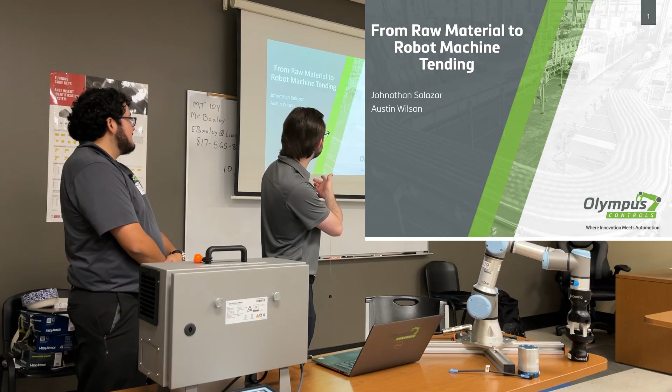So I'm Austin Wilson, we're with Olympus Controls, and Johnathan Salazar. So we'll be talking about machine tending, so how to work with a robot and tend a machine. A little bit of background about us.

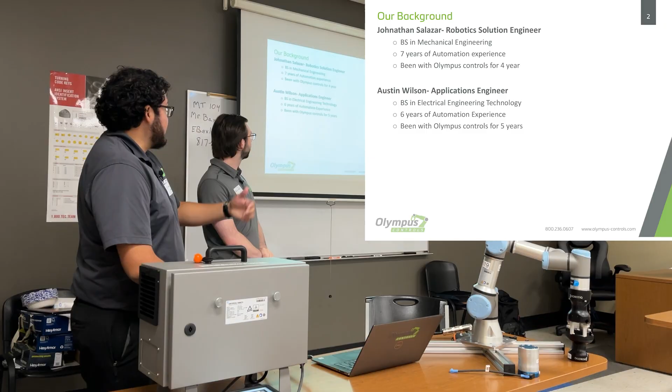So my name is Johnathan Salazar, Olympus Controls. I am the robotics solution engineer. A little bit about me, I graduated from University of North Texas in 2018 with my mechanical engineering degree and kind of hit the ground running with automation. I did my capstone project, my internship, and first job all with the UR robots and automation things. So got about 7 years of experience at this point and been with Olympus now for about 4 years.

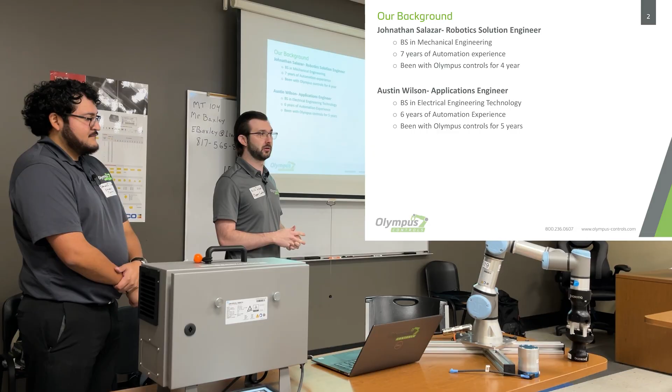I'm Austin, like I mentioned. I am an applications engineer with Olympus, so I focus on technical installs, technical support for our customers and our sales team. Been working with automation for about 6 years now and got my bachelor's in electrical engineering technology.

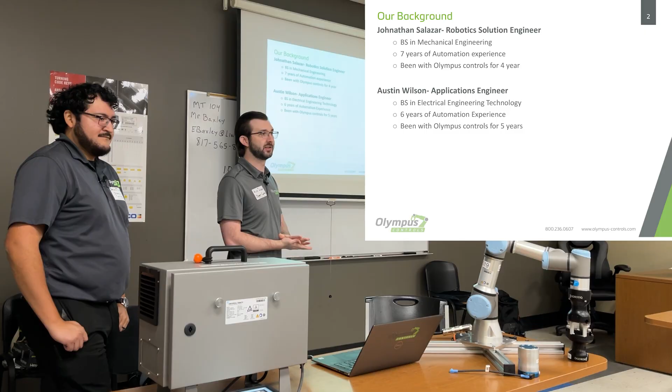A little bit about our company background. So we work for Olympus Controls. Olympus Controls was founded in 1998, in the Northwest area near Portland, Oregon. We're a high-tech automation distributor, and we focus a lot on motion controls, machine vision, and now recently robotics.

But we're also diving into more engineering solutions. We have a whole team dedicated to just doing custom builds from the ground up, from simple things like robot mounts to custom enclosures, all the way up to a custom autonomous vehicle robot. So kind of an all in-house powerhouse.

We've been with UR robots for about 12 years now. And now, plus or minus one, we're the largest UR distributor in North America for Universal Robots. UR was founded in 2007, and they are now the #1 collaborative robot supplier in the world. So they coined that cobot term and did a lot to push the idea of the collaborative robot, not just the traditional industrial robot, but a more approachable, easy-to-use, easy programming kind of robot.

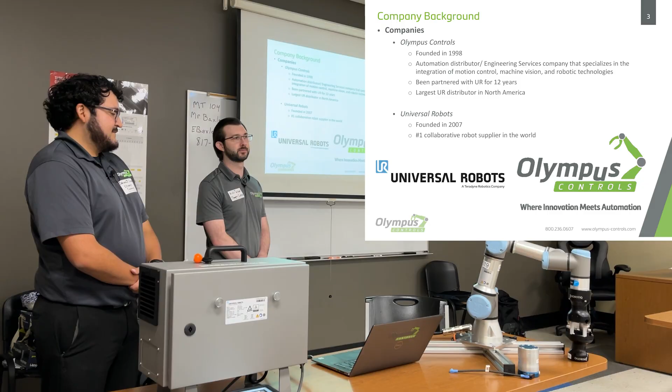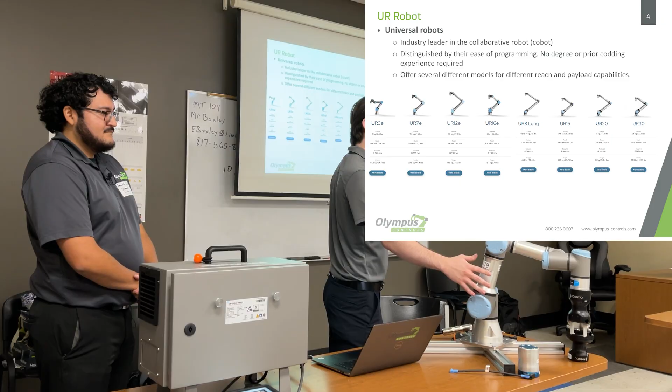And this is their product line of all the robots that UR has. So they go as small as these robots here with the 3E. The number you see there is their model and also the payload for the robot. So 3 is 3 kilograms, about 7 pounds is what it can pick up. And it goes all the way up to 30 kilograms, so over 60 pounds is what that highest end robot can pick up.

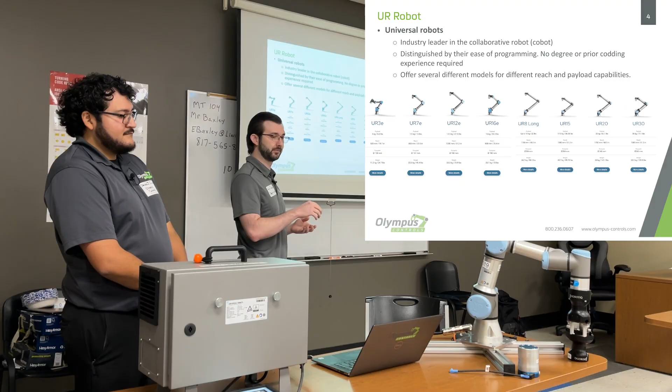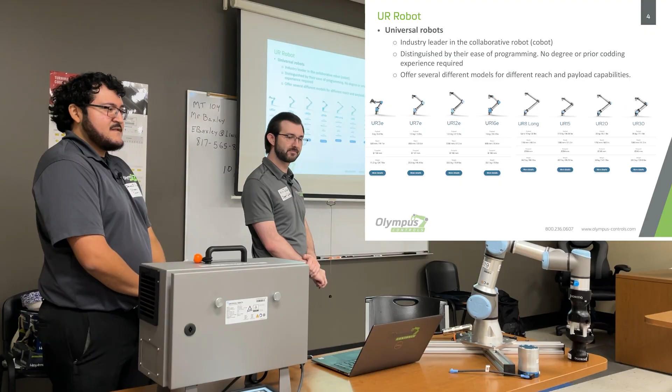So they have a lot of different offerings, a lot of different reaches as well. If you need a longer robot, they have a new long robot right there. Rule of thumb is the bigger number, the bigger reach of the robot, bigger payloads. A couple of discrepancies, like the 8 is a little bit less payload, but longer than the 16 and 12. But rule of thumb is bigger number, bigger payload for sure, usually bigger reach.

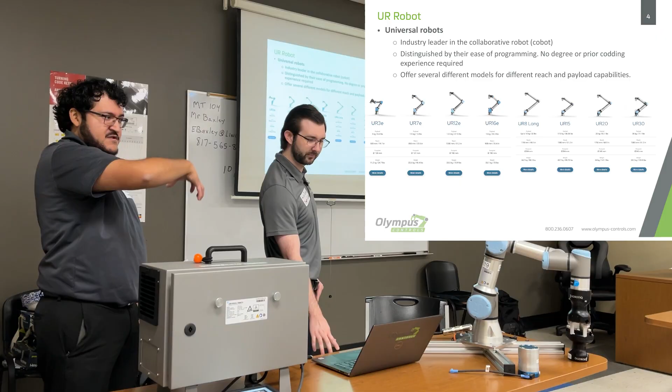The sweet spot for machine tending is usually around that 12E range to the 20, depending on part size. That's a good reach for reaching multiple machines to and from your work area and picking up the heavy parts with tooling.

And then this is a quick guideline for different steps to think about if you're doing any type of collaborative robot install, not just machine tending, so your throughput, the reach and the payload of the robot, and parts and presentation, that's a really big one. Not enough people focus on it, because with all automation, we really want our parts to be oriented and fixed the same way every time.

The robots are going to go to the same place every time. So if you can make sure your parts are in the same place every time, you'll be solid. But they really don't like variation. So if you can get rid of all your variables and movement in the system, that'll really help you out a lot.

Collaboration, you have to consider how it will work with humans. Connectivity and integration, I'll talk a little bit about that later in another slide, but you really just need to think about how it's going to interface to your machine, and there's a few different ways of doing that.

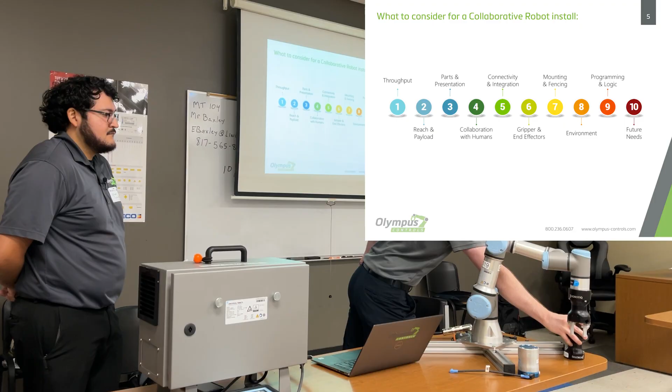Grippers and end effectors, so Jonathan will talk about that a little later, but we have a bunch of different options between concentric grippers, 2-finger grippers, vacuum, suction cups. We have this little magnetic gripper here for ferrous material parts. And so that's another consideration.

We have mounting, fencing. So these are collaborative robots, so you normally don't really need fencing for them because they will stop if they hit someone. So your more standard, like what you'd imagine a really heavy-duty robot, those usually do need fencing because they can crush people. They can be very dangerous. And yeah, that's pretty much it.

Environment as well. So their newer robots are IP65 rated, so they're waterproof. So that's pretty cool. Keep in mind it is an IP rating, so it is water testing. Sometimes cutting fluid is a little bit more viscous than water. It can be a little bit tougher than typical IP ratings, but keep in mind there are options. You can add like a suit on top of it or some kind of waterproofing ponchos to ease with that.

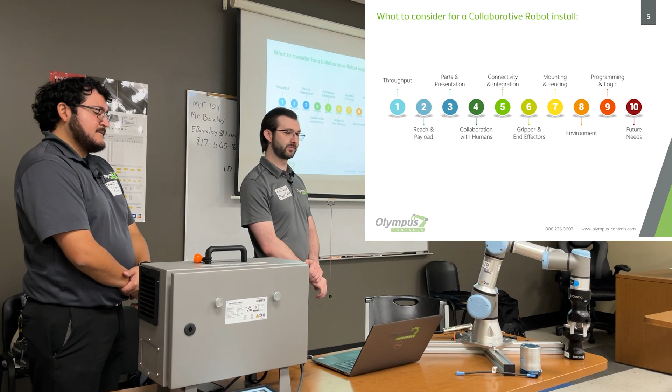Okay, so the 3 questions you should ask when dealing with machine tending: what kind of material are you dealing with? How many variations of parts are you dealing with? And then how is the part being presented? Those will kind of guide you in tooling options and part presentation, any kind of external equipment needed for the application. So first bullet here is where's the material coming from?

This is ranked from easiest to kind of a hard part presentation. Easiest would be the robot's not dealing with it. If it's a bar feeder inside the lathe machine, the parts feed automatically. The robot just deals with the outfeed machine part, gripping it, placing it in the finished pile.

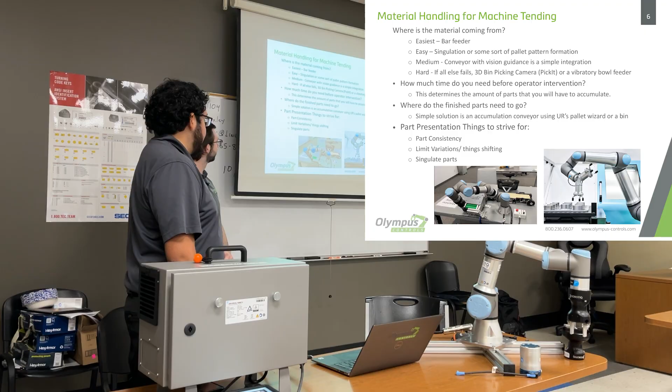Next up, for easy, would be some kind of singulation or some kind of pattern for you to take advantage of. Maybe the parts are stacked up on a table in a certain array, or it could be something simple, like the example here, a gravity feed system that feeds the part up to the same pickup position every single time. Correct, gravity fed like round stock. Typically gravity fed's good for round stock, kind of lathe machine tending, as long as you can account for all the part sizes. And then the pallet or templates is more for square parts, square blanks.

Next up in difficulty would be this medium example of maybe you're picking parts off a conveyor. That usually means coming off some kind of upstream process, and you have to account for some of the variation of the parts. They could be upside down, they could be skewed on that conveyor. Assuming we're flat, we can do something like a 2D vision system, or even some kind of mechanical guidance or fixturing for the parts. So the camera is integrated with the robot?

Correct. So Universal Robots is a brand just as the arm, and they open up their software to be open source. So a lot of third parties have come in and designed custom tooling, as Austin touched on. All these tools are not UR tools, they're a third-party brand: Robotiq, OnRobot, Zimmer. A lot of them have different 2D cameras that are nice and plug and play. They've got specific software, you upload the URCap to the robot, and it's plug and play. Tested and vetted by UR too. So that's the 2D vision example.

And then the hard level, the most difficult, would be some kind of random picking. Maybe the parts are on a conveyor, but they're all stacked up and skewed. So typically some kind of bin picking system. What you can do there is some kind of 3D bin picking software and camera to account for that, or maybe even something like a vibratory bowl feeder to help stage those parts. But that is going to add the most complexity to your programming, more cycle time, and more cost. Well, that's expensive.

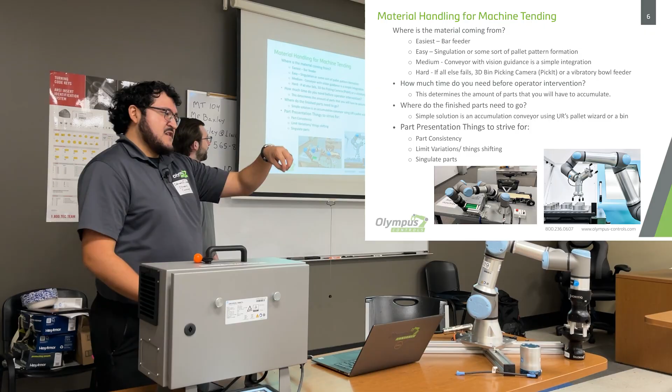Next bullet here, where do the finished parts go? Again, just thinking whole picture. After the part's machined from your CNC machine, where do you place it? It could be something simple, like back on an accumulator, a single drop-off point and the conveyor just queues it up. Or something simple like some kind of bin for the good parts. Depends on the part as well. If it's delicate, you don't want to drop it in a bin, you want some kind of nice placement. It could even be putting the finished part back on that same pallet you just picked from for the tender.

And then, of course, rule of thumb is the 3 things we strive for in machine tending for the parts is nice part consistency, meaning part to part, they're going to be the same size and same shape. You can run multiple size parts, that's fine, but part to part you want similarity.

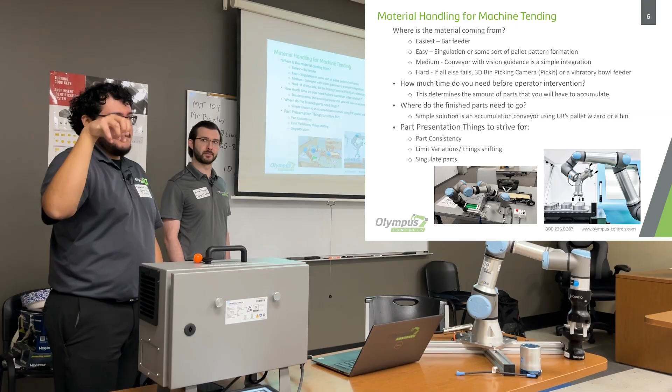The example we give is, think of your own arm as the robot arm. You're very repeatable, so you can come back to the same spot within 0.01 millimeters over and over again. But you're blindfolded, you have an oven mitt on, and you have a pair of tongs as your tool. So you don't have the ease of use of vision or force feel to pick up parts. So if something changes, if your part's differently shaped or it moves, you have no way of accounting for that. So you need extra things involved.

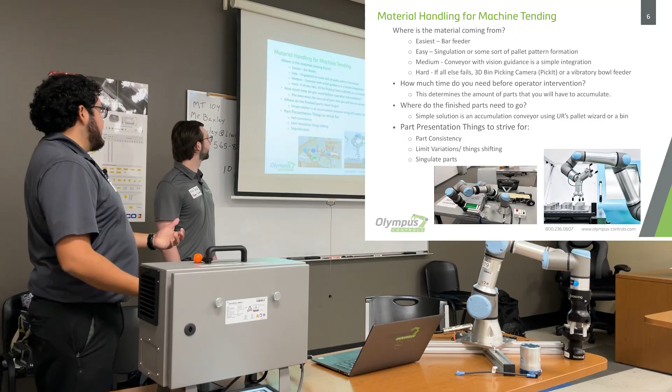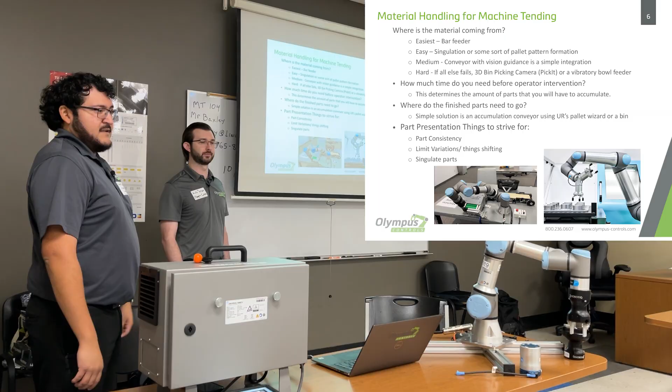The robots do have a built-in force sensor. We can take advantage of that to do a force feel and touch off, but it does add cycle time. So added tools, added costs, added time. So along that same topic, limit variations and things shifting. Make sure everything's nice and rigidly bolted down. You have some guide pins for your fixtures. That way when things come back in, it'll be in the same spot every single time. And if possible, singulate parts. Make it easy. One single pickup position.

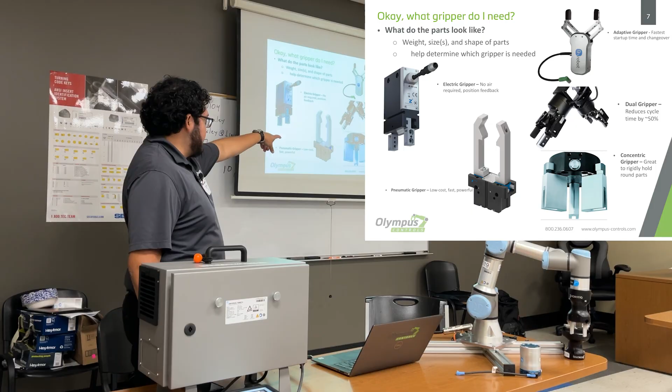One step up would be something like a simple electric gripper. They might have a URCap software, or they might not. It could be just IO settings, on, off. But this will give you a little bit more position feedback, a little bit more options, and the possibility of a URCap. Kind of in between there is the concentric gripper, bottom right. That one is more for round parts. 3-finger jaws that close in. That's great for any kind of round stock you might be picking up for lathe machine tending. Those can be either pneumatic or electric.

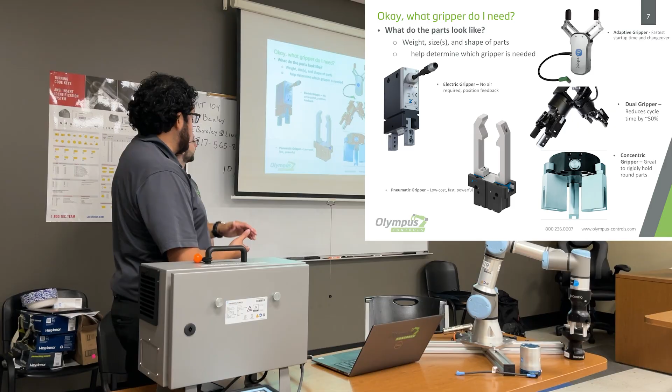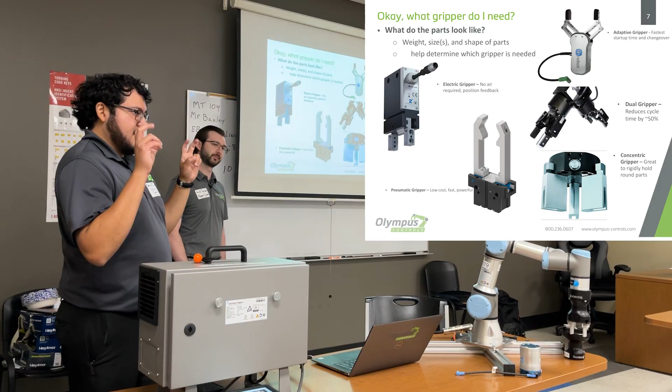And the top tier would be something like an adaptive gripper. A couple different brands. The ones we use a lot are OnRobot and Robotiq. These are more advanced adaptive grippers. The benefit is you have full access to the stroke, the speed, and the force. And they are collaborative, so they're not going to hurt the human being. It'll give you a little bit of a pinch, but it won't hurt you.

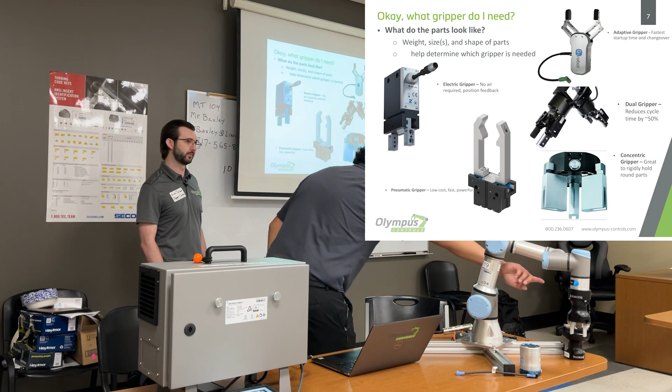They do come off the shelf with nice mounts and a nice even IO coupler, so you can bolt right to the end of the robot wrist, as shown here. So you limit a lot of that need for cable management, running tubes or pneumatic lines all the way across. It's right at the end of the robot.

And along with that same thing, dual gripper, that can be any of these above mentioned options. It's just doing 2 grippers instead of 1. If you think about it, that can help your cycle time immensely. The process normally is you open up the CNC machine, you'll pick up your finished part, drop it into the finished part pile, come back over, pick up a new blank, and load it into the machine.

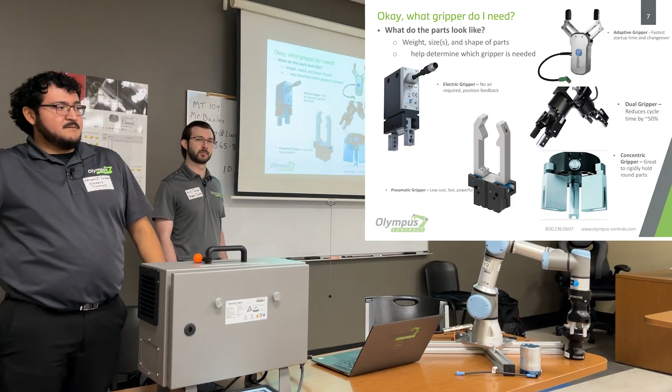That's a long process. If you have 2 hands, you can pick up a blank, open the door, go in, pick up the finished part, go ahead and drop off the new part, and then come out. You save half the time of coming in and out of the machine. So big benefit for machine tending, very common.

Along that same subject, we'll stay on with a real case study. This is one of our customers out of Tulsa, Oklahoma called McElroy. They are an in-house OEM manufacturer. They do things like spline tubes. They basically add the tube finning on the end of metal tubes. But they manufacture a lot of their machines in-house.

And so they got a bunch of CNC machines, and they're doing a lot by hand. There's no automation besides the CNC machine, and they're looking to automate, kind of get their feet wet with it. They approached us looking for a Universal Robot, a cobot. They were interested in ease of use, no need for other caging or safety equipment, and something they could redeploy to different machines if needed. So kind of redeployable robots.

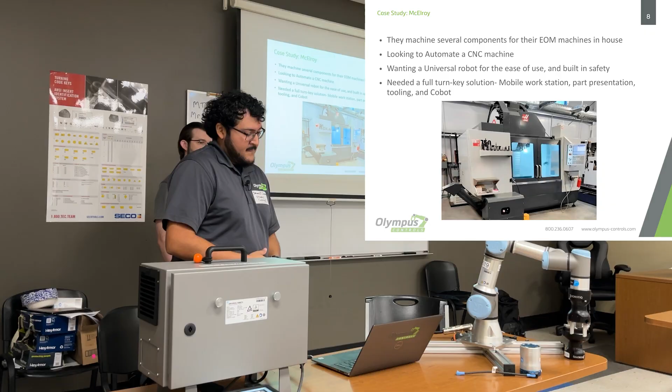They did ask for a full turnkey solution, so they wanted everything. They wanted the mobile stand, the cobots, any kind of tooling, any kind of custom grippers, part presentation fixturing, and help on site with deployments.

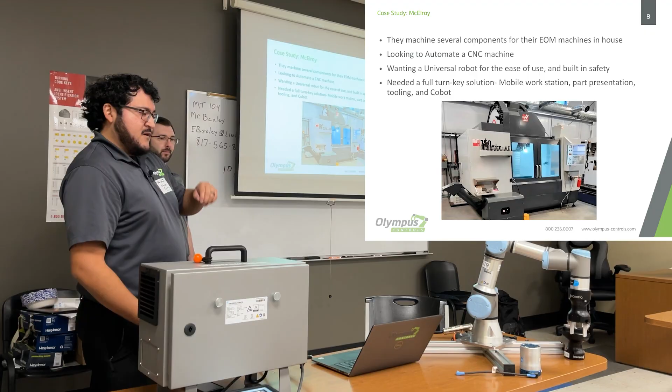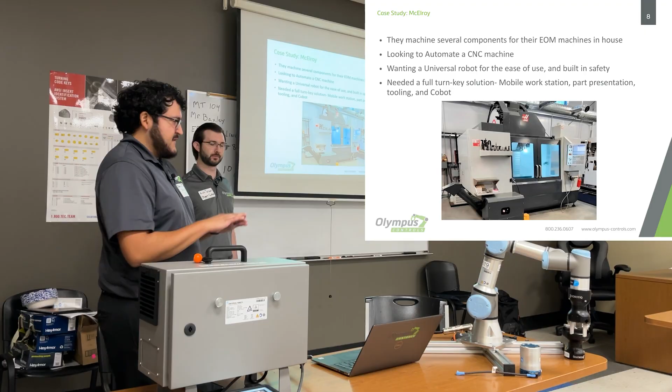The parts they were running, there were 2 size parts. They were aluminum blanks, so aluminum rectangles, 3/8 inch thick, and the sizes were 3x4 inch and 4x6 inch. So we need one tool to pick up both parts. But they were simple shapes, rectangles, nice, easy to pick up.

So right off the bat, a couple of things we can get off the shelf. For example, the UR10e robot was our choice. Again, that's kind of the sweet spot. It's a good reach for the application, and good payload to pick up your custom tooling and the light parts. For gripper, we went with a pneumatic gripper. They were kind of cost conscious, so we said pneumatic would be a little bit cheaper. It'll give us enough force and speed to pick up these parts fast.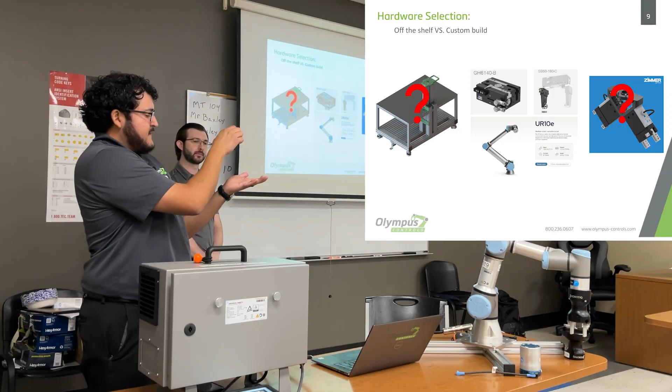One thing we haven't mentioned is we went with a custom fingertip design on one of them called the swivel fingers. So with the machining process, there was a 3-stage process, 3 vises inside the CNC machine. Going from stage 1 to stage 2, it required you to flip the part upside down. Typically, that requires you to drop off the part on a fixture and have the robot come around and pick up the part upside down to achieve that pick position.

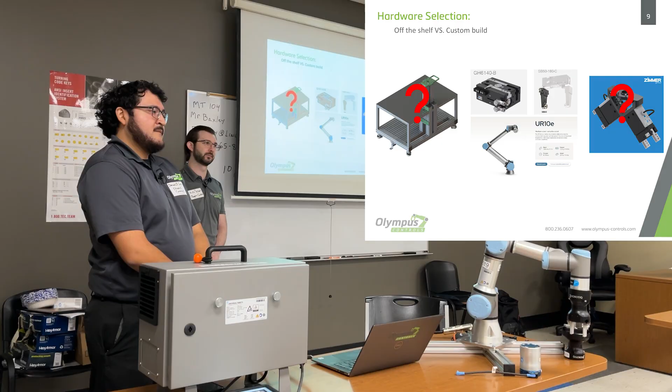They were worried about cycle time, and so we found this nice solution from our supplier, Zimmer, that had a pneumatic flipper finger. So in hand, when gripping the part, it would automatically flip the part around 180 for you. So we tried that.

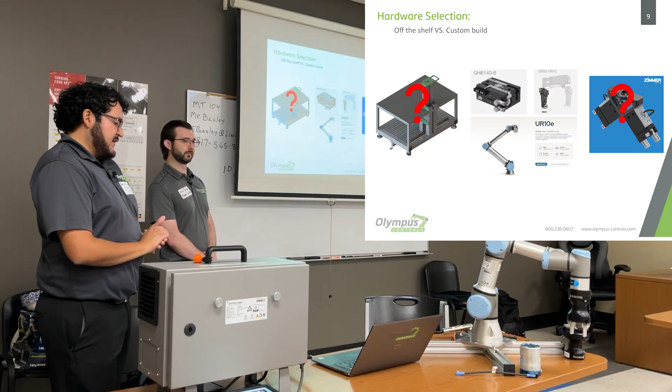We did want a dual gripper mount, but there was no off-the-shelf option for that, so we had to design a custom dual gripper mount. And then they also wanted a custom mobile table of a specific size. They wanted, I believe, 2 shifts worth of parts. And so given the part size, we kind of figured around that.

So here was the customization parts. I took care of designing all the custom things. So here was my design for the mobile table for the robots. Kind of a simple design. On the top, we did fit it up with breadboards. If you don't know, breadboards are kind of machine plates that have predefined spacing for threaded inserts.

And so the benefit there is we can use something simple, like some threaded rods, to fixture the parts and make a nice array for the robot to pick from. Again, going back to that easy application, we're picking up from a predefined grid of parts every single time. And you can stack them up higher. So I believe it was up to about 5 layers of parts, is that correct? 4 or 5? I think we did more. More than that? Did like 10.

Yeah. So based on the reach of the robot, we spec'd up the table, and then the amount of parts drove the design for that table. Pretty simple: aluminum extrusion frame, a machined base plate for the control box and other things, and a breadboard on top, like we said.

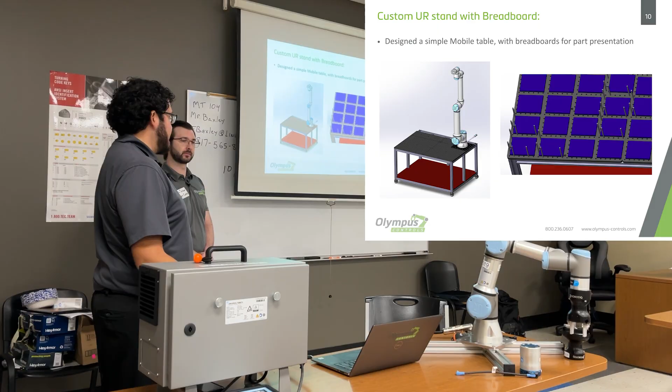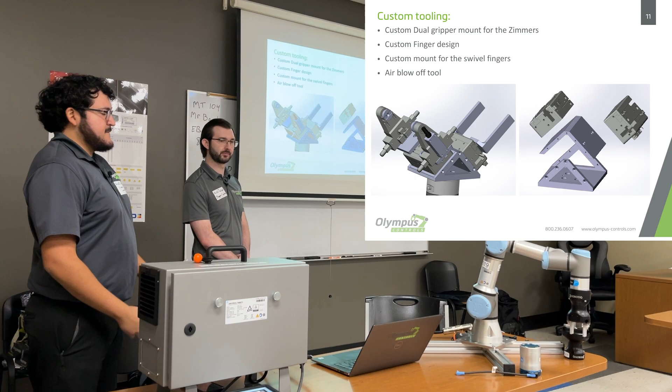On the tooling side, like we said, the grippers were off the shelf and the fingers were off the shelf for the tool, but everything else had to be custom. So I designed this custom dual gripper mount in 2 pieces, a top and a bottom half. The benefit there was just ease of assembly. You can bolt the grippers onto the top part of that assembly, bolt the bottom to the robot, and then combine both at the end.

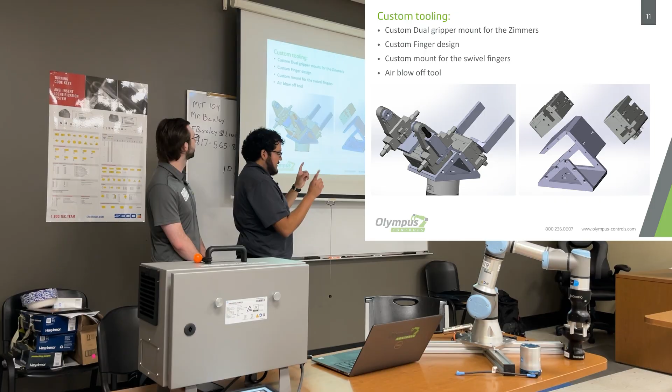Plenty of space too for cable management. There's going to be a lot of tubing coming across here, all pneumatic. And shown here too is the custom swivel fingers, with little custom nubs to pick up the parts, and then some simple custom fingers for the other part. They were flat parts, so the fingertips were pretty simple, just flat surfaces to grab onto.

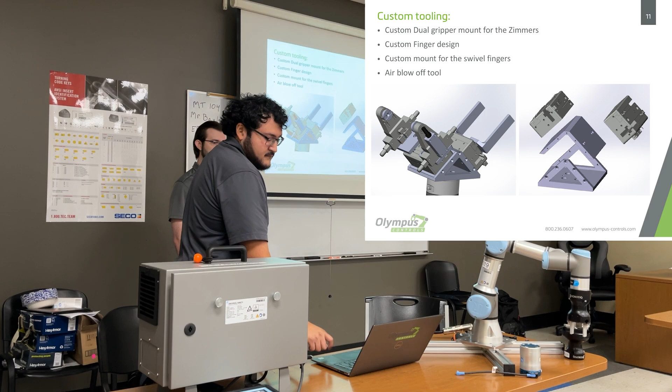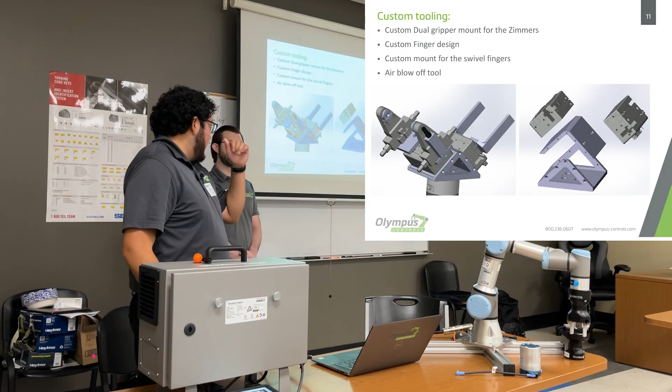We did see some slippage. Even though it was nice contact, if there's any raised part on the flat part, it would pivot on it, with two points of contact making it pivot. And so the solution there was to machine a little groove on the end of the fingers, a flat slot that we can actually bottom out in and have 3 points of contact instead of just 2. I believe they did end up knurling the edges of the fingers a little bit too, to give it a little more grip. More grip, yeah.

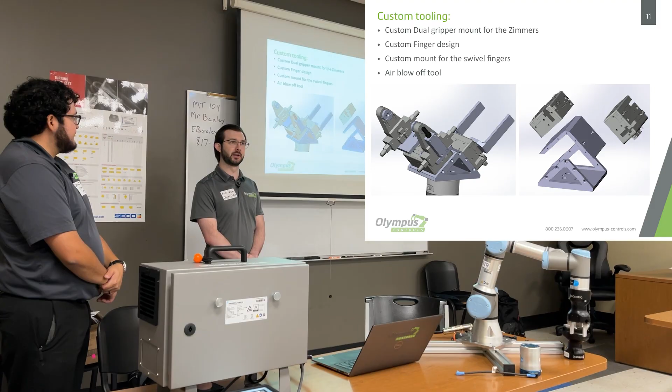After everything was designed in CAD, I threw it into a robot simulation software just to verify no problems with reach, nothing was binding up or singularities for the robot. It all looked pretty good.

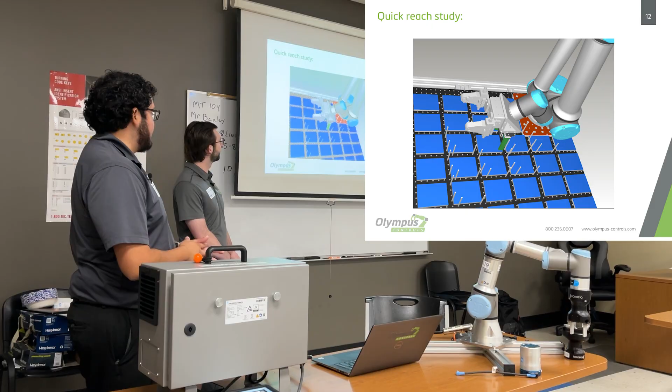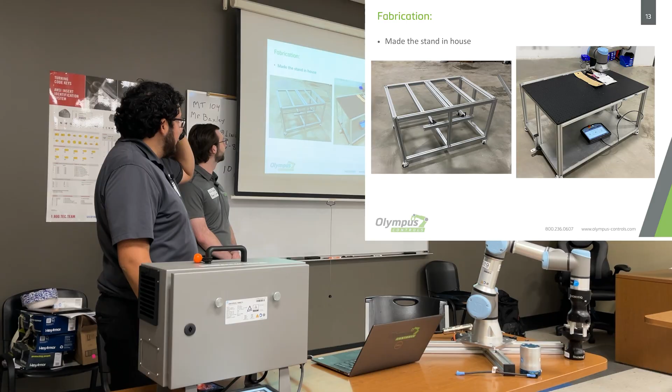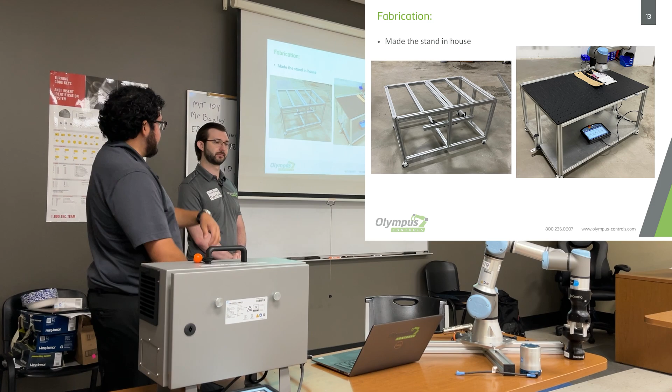And so we got to fabricating. We tried to make everything in-house as much as possible. I went and cut the extrusion, tapped all the ends and assembled it in-house. Everything machined, though, we did outsource. We do have a local machine shop at our Kent office counterparts, and we machined some of the stuff with him or just with local machine shop suppliers. So breadboards, of course, bought out, the bottom machine plate bought out, and all the extrusion we had in-house and cut and fabricated.

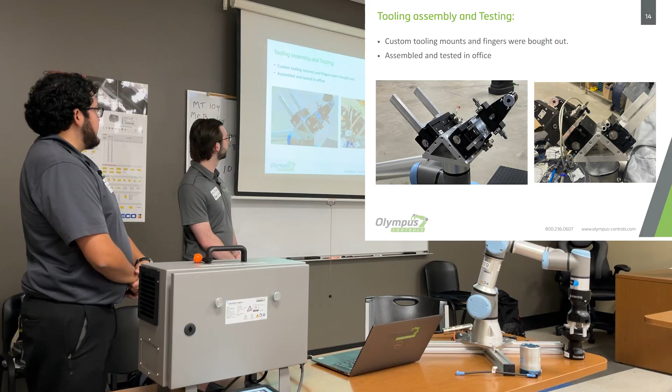And here's what the dual gripper ended up looking like. Very similar to the concepts. Again, the custom flat fingers, and then on the other side, the swivel fingers.

Cool. Oh no, what happened? There we go. Cool, cool.

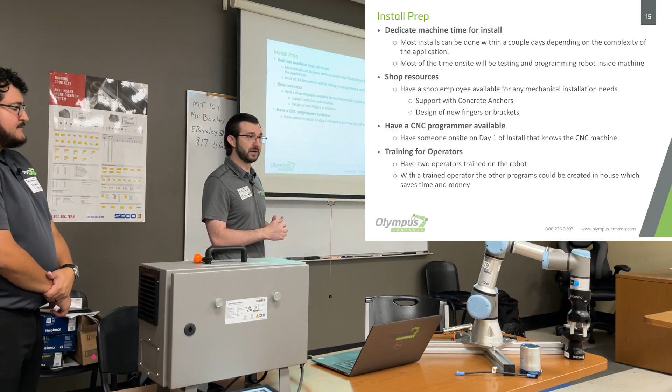Yeah, so I went on site to help install the machine. So generally what we recommend is to dedicate downtime for the machine, and if it is running parts, have those parts running on a different machine. Generally the install can take up to a few days, depending on the complexity of the application, how difficult it is to get the parts into the machine with the robot, and other factors like we mentioned before, like how well the parts fit onto the fixture.

If they're very fixed and not moving around, then that's going to make a quicker install in the long run. So generally, most of the time on site is just going to be programming the robot, which, like I said, could be a couple days.

We have done some installs where only one day was needed on some very simple parts, where we're just picking all the parts from a fixed point, the conveyor is bringing the parts down to that fixed point, and then we're just loading that part in the machine, taking it out and dropping it off again at a fixed point.

Also, when we come on site, usually we'll recommend shops to have other resources available to us. So concrete anchors is a big one. We want to make sure that the fixture going up to the machine is secure and that it won't move or walk over time. So having someone on site to help with concrete anchors or to show us where to put the concrete anchors, that will help a ton.

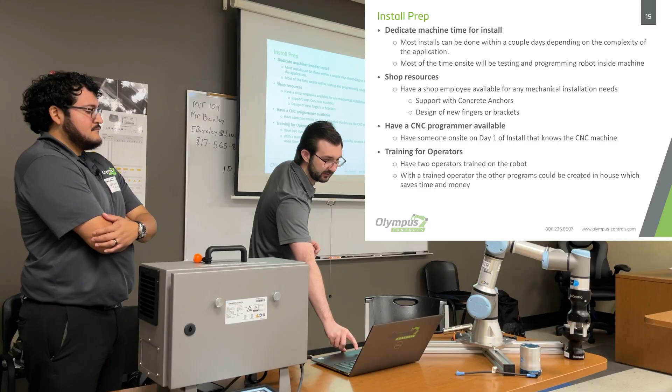Okay. All right. And then the last thing is training. So we recommend to have at least 2 people trained on site with the robot. This is just to prevent, in case the one person who knows the robot leaves, then you lost all your knowledge. So we like recommending at least 2 people to know it. And usually we'll focus on training on site as well, just showing them the pendant and how to teach some points and some basic error recovery. And then if someone wants to really own it and create their own programs from scratch in the future, we also have some training that we provide at our office as well.

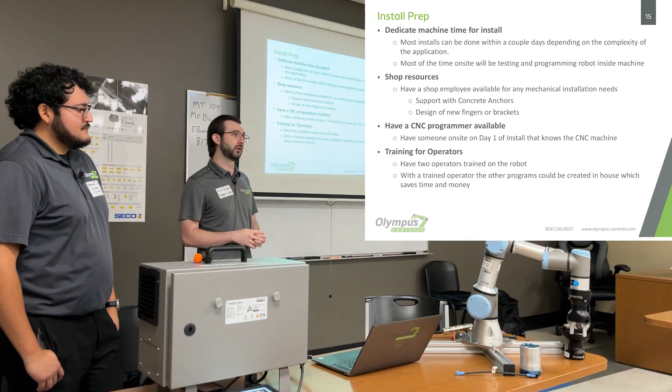Okay, so how do we talk to the machine? So we have our nice cell, we have our table, we have the robot on it, and then we have the machine right next to the robot. So how do we get the communications from the robot to the machine? So there's a few different options. So the most basic and simple is usually just a simple digital input or digital output from the robot to the machine. A lot of machines have what's called an M-FIN signal, which is basically just a configurable signal that the machine can set up, and it's looking for some signal from the robot. So again, that's very simple.

Also, there's plenty of industrial protocols that are over Ethernet. So EIP is a very common one. Modbus is also another common one. And then there's also third-party systems that handle all that integration for you and handle that communication. So in this install that we're talking about with this case study, we actually used one of those third-party systems called VersaBuilt, and that handled the communication from the robot to the machine. It allowed the robot to call specific programs from the machine and I/O as well to turn on outputs. And the nice thing about that is it also gave a pretty sleek interface on the robot as well.

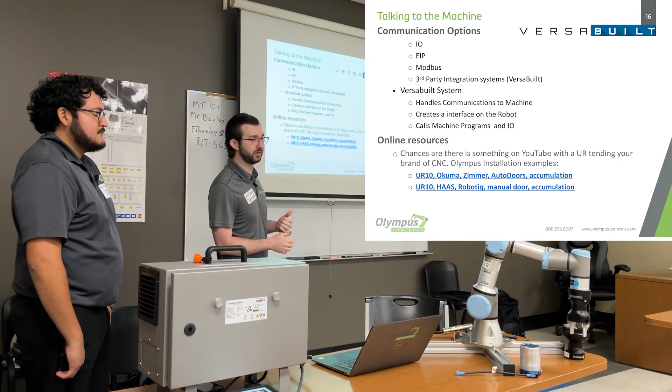Different programs can be installed on the robot? Mm-hmm. Yep. Correct. So like I said, UR just focuses on the arm, and then third parties develop these softwares or plugins for it. Think like an app on your phone. And so yeah, at least a bit better interface for dealing with the robots. And then also, if y'all need help talking to the machine, there's plenty of online resources and examples as well.

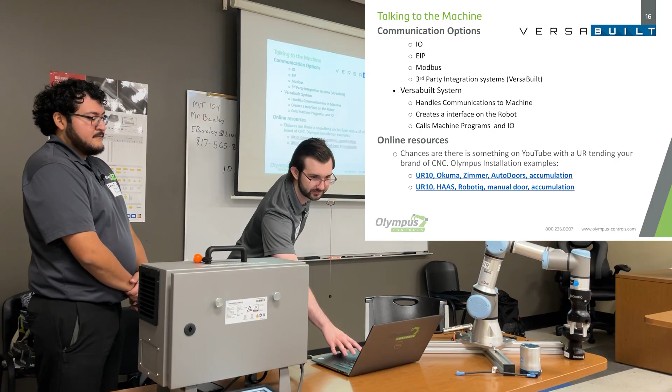So hopefully this video loads. Maybe. It doesn't look like it's loading anyway. Okay. Huh? Yeah, it's trying to go to YouTube. Ah, darn. Oh well. Yeah, we have a video example next. But yes, there are plenty. Okay, yeah, there we go.

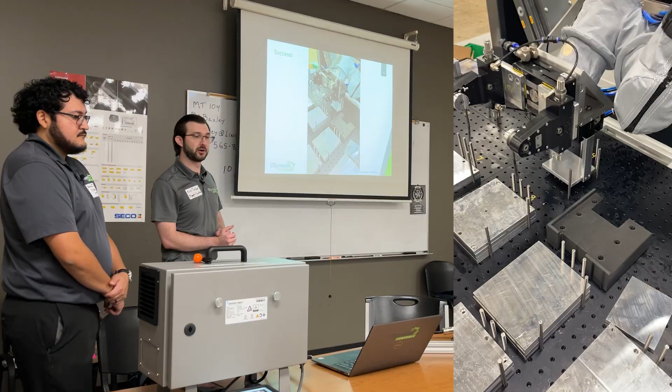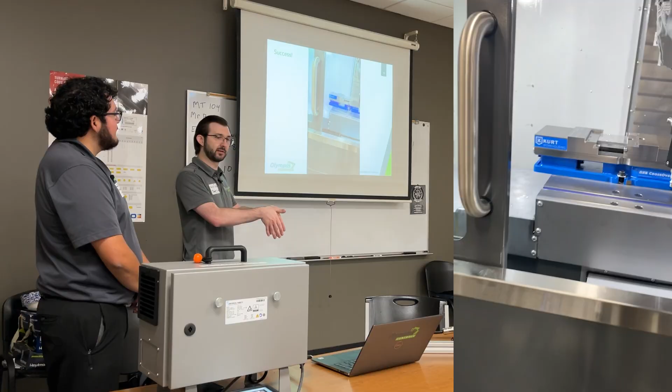So this is a video showing our actual application on site once we got it all working. Your repick station. Yeah, so they added a repick station because they added grooves to those flat fingers, and the repick station just made sure the part was inside the groove there to keep the part flat, so the part didn't tilt in the fingers. Part going from stage 1 to stage 2. See here in motion once it picks up. We'll flip it right here.

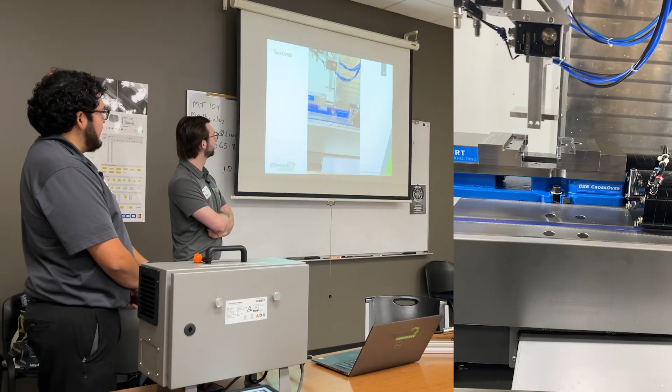Flip. Clean up the vise. Drop off the new blank. Put a force in the back. Square it off. Yep. Yeah, that's it.